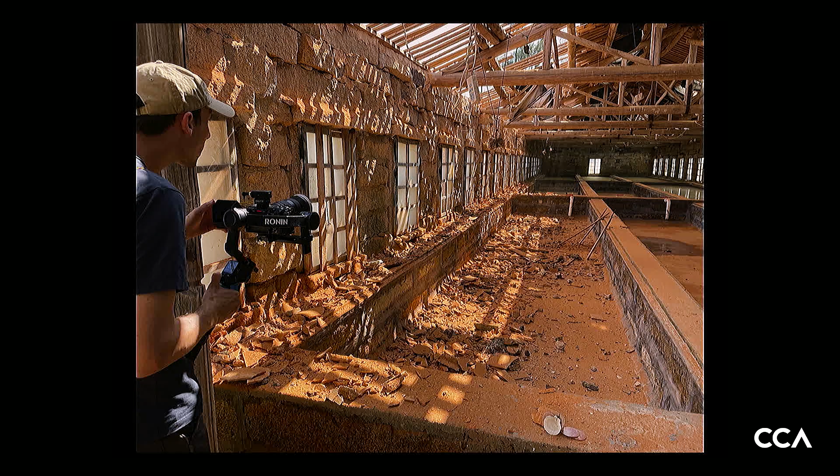In the CCA galleries tonight, you will encounter a film shot across October and November last year, 2023, documenting the encounters, the visits, the research conducted by Xu Tiantian to progress the project in Meizhou Island, but also artifacts, documents, specimens, and site fragments as evidence of an ongoing thinking process focused on the relationship with communities, reactivating rural and biological systems, and using architecture as a practice of repair and care.

Tiantian will tell us more about the story in a second. So I think it's a moment to introduce the protagonist of the night. I will just mention a few words about you, Tiantian.

Xu Tiantian is the founding principal of DNA Design and Architecture, and she's professor in practice at Tsinghua University School of Architecture. She received her baccalaureate in architecture from Tsinghua University in China and a master's degree in architecture and urban design from Harvard GSD.

Xu Tiantian has engaged extensively in revitalizing processes in rural China, and her holistic approach has led her to be selected by the UN, with several projects used as case studies for inspiring practices on urban-rural linkages.

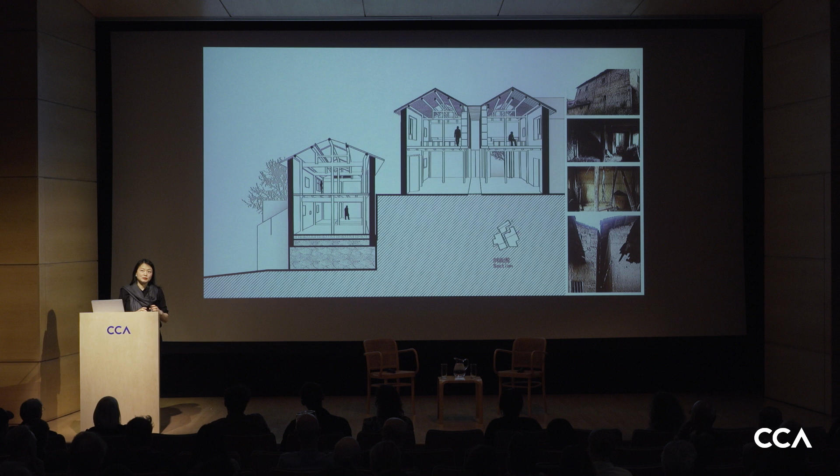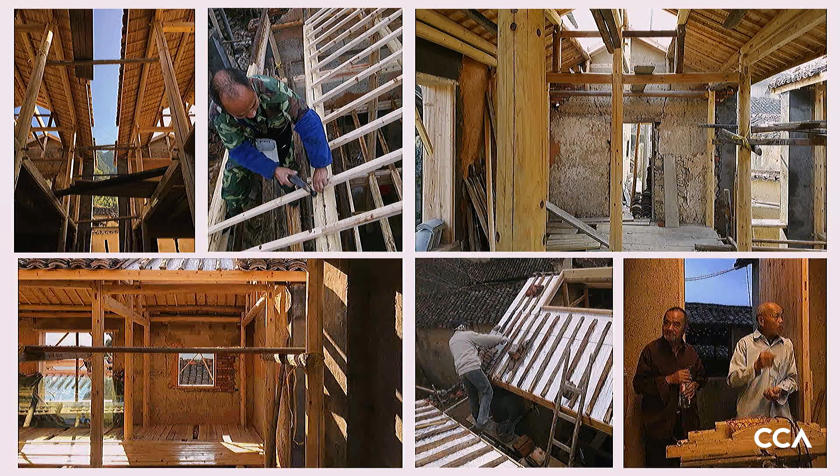Even though they were in poor condition architecturally, they still represented the original fabric of this ancient historical village. So we made the proposal to preserve this cluster without touching the exterior, because of the regulations of this traditional village, by only reorganizing the interior program and opening up the space to accommodate community programs and potentially other programs. We presented this proposal to the local county government as a pro bono design project, requesting the county government to sponsor the funding for renovation of this cluster for the village community.

This really became the beginning of how we started this collaboration in the county for 8 years. The project was constructed by the local villagers, and the interior space could be reused for different programs like exhibitions or

artist studios. Actually, the space after renovation inspired two young artists to return home from Hangzhou city and set up their studio, a fabric studio, which also brought new cultural and educational programs. These young artists also helped the local villagers work with handcrafts and sell them on the internet. So this really became a new transformation for this ancient village.

When we first arrived, there were less than 20 elders living in this village, and after a few years, the number of inhabitants has grown to over 200. So this really becomes a starting point of a systematic collaboration we proposed to the local county government by adapting this architectural acupuncture approach.

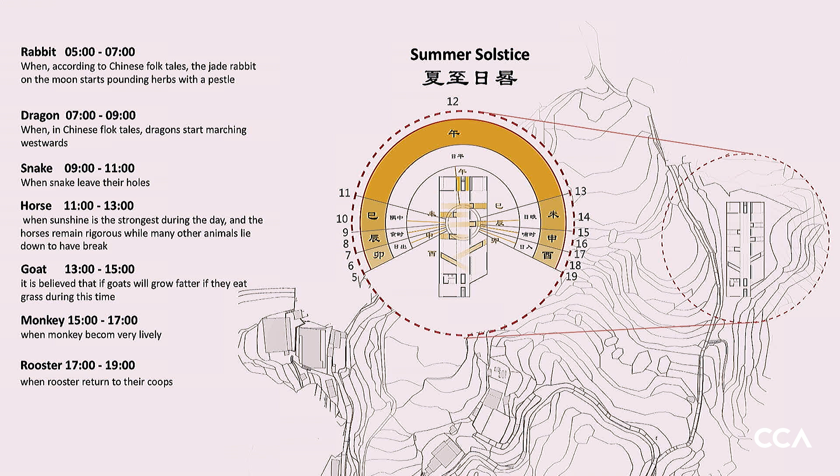During the summer solstice day, from sunrise to sunset, there are 7 zodiac hours: rabbit, dragon, snake, horse, goat, monkey, rooster. The zodiac pattern is based on the different species and their activity patterns.

So the building, with a simple form, has light tunnels coordinating with the sunlight angle of the different zodiac hours.

This articulation brings, during the summer solstice, light into the space from sunrise to sunset, passing through different light tunnels that act as a sundial.

By noon, the horse hour, it moves into the afternoon. The space really becomes a sundial, and we wanted to take this as an interpretation of how tea cultivation also becomes a culture, a symbol in our culture.

At the same time, the volumes, as light tunnels, become a monument, as if the sunlight is frozen during the summer solstice time.

We found that exploring into the agricultural past and history is really about how people live in this place. People have lived in this village for many generations, for hundreds of years, and each village built up its own legacy, its own cultural history and heritage.

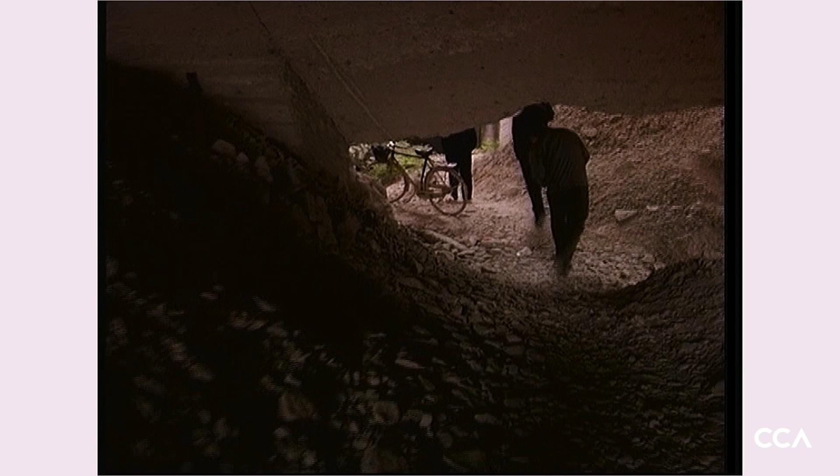I want to start with a documentary taken before the quarries were closed down. You'll understand that these spaces were manually quarried by local workers with skill and technique passed through generations over more than 1,000 years.

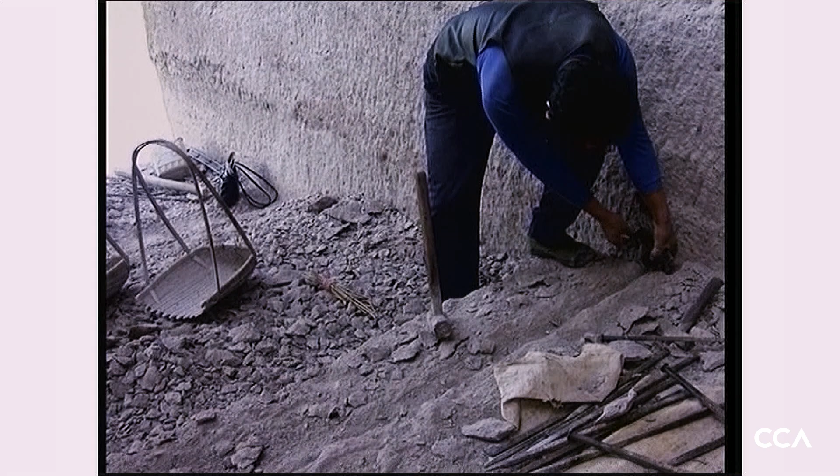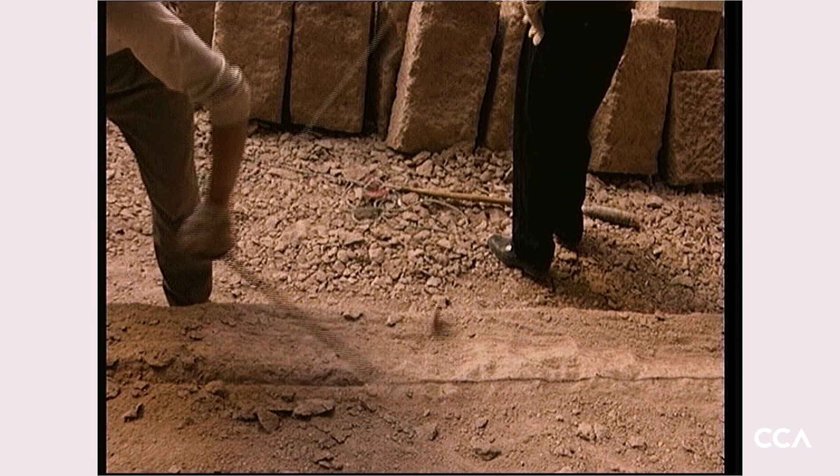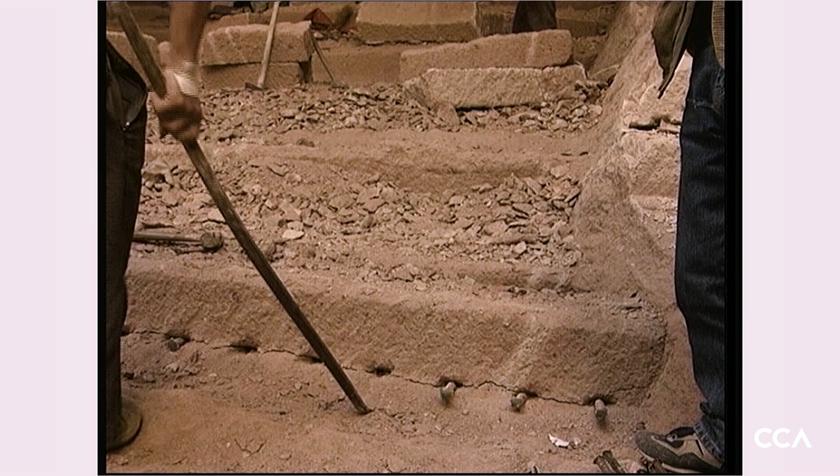On one hand, it's a technical heritage, but on the other hand, it's also very harsh, intense labor work in a very harsh environment. People living in this region made their living out of this quarry, this very intense quarry labor work.

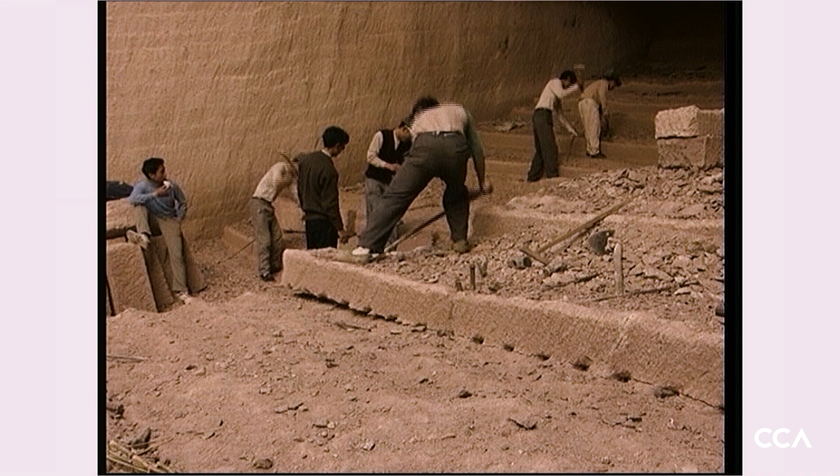So when we first visited all these abandoned quarry spaces, we were definitely overwhelmed, really impressed by the space, but at the same time also came to understand how local quarry workers were very passionate

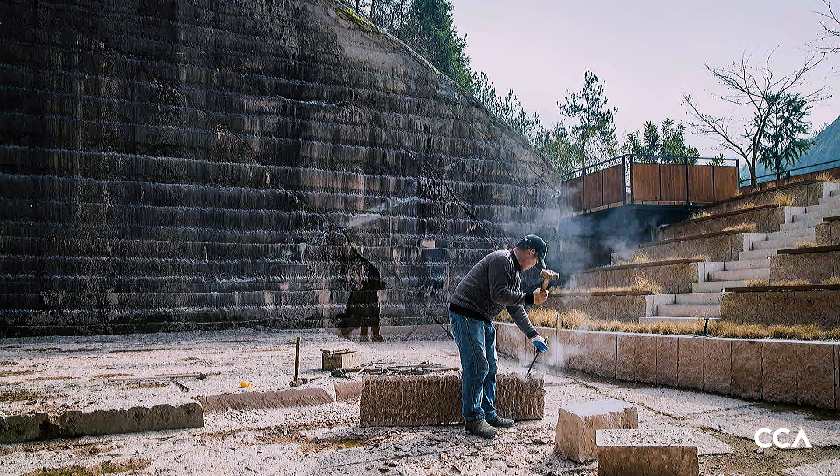And just within 6 months, 3 quarries were built with a new design intervention, with the first one as a showcase stage for the local quarry workers. It's really by their request. They wanted to still have a space to demonstrate their technique on quarrying, on this manual quarrying.

And the second quarry becomes an open theater for young villagers or for traditional opera performance. And the third quarry, taking the interior geometry, becomes a book mountain, addressing the local literati spirit and calligraphy history.

So I think for the quarry project, it was more to try to understand the local collective memory and take this existing abandoned quarry space as existing structure, existing architecture, so to reuse the space instead of making new buildings on quarry as topography.

And on the other hand, it's also not only to appreciate the beauty, the sensation of this space, but rather to understand the struggle of local people and what they believe in or what they hope for.

And for us, these quarries were really also the monumental architecture built by local quarry workers as anonymous collective. And architects join in this process as the facilitator to contribute and also to transform these already existing monuments into something that can be accessible for the public and also can connect back with the collective memory belonging to the communities.

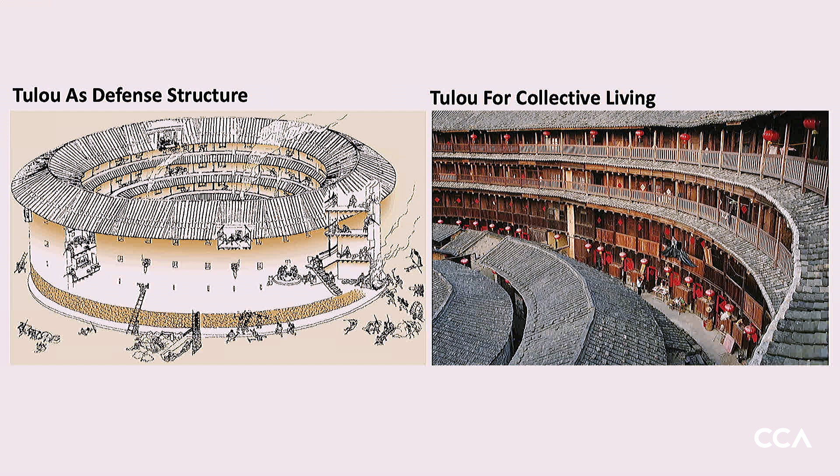the only vernacular typology that is without hierarchy, because every family will have even distribution on the units, on the families.

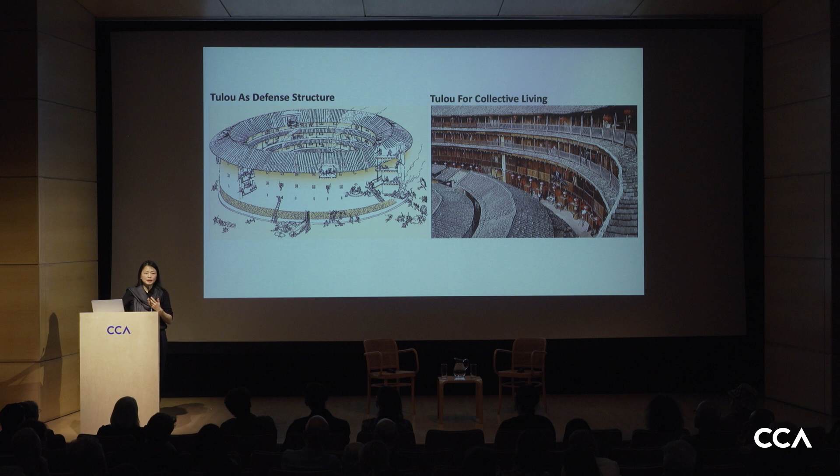And I think for decades, with the economic development, Tulou eventually lost its original functionalities. So many people moved out of the Tulou buildings, and thousands of Tulou actually became vacant or abandoned. So that's really the current condition.

We encountered Tulou with just a visit to the region, and then we realized this is an urgent social architectural issue that could be fixed with design as a solution.

The problem with all these Tulou as heritage buildings is that with the preservation policy, you have to rebuild everything. So the local government wouldn't have enough funding to rebuild thousands of Tulou buildings.

But if we take the ruin as a new typology, then we can collaborate with the local community by looking into taking the current condition as the starting point.

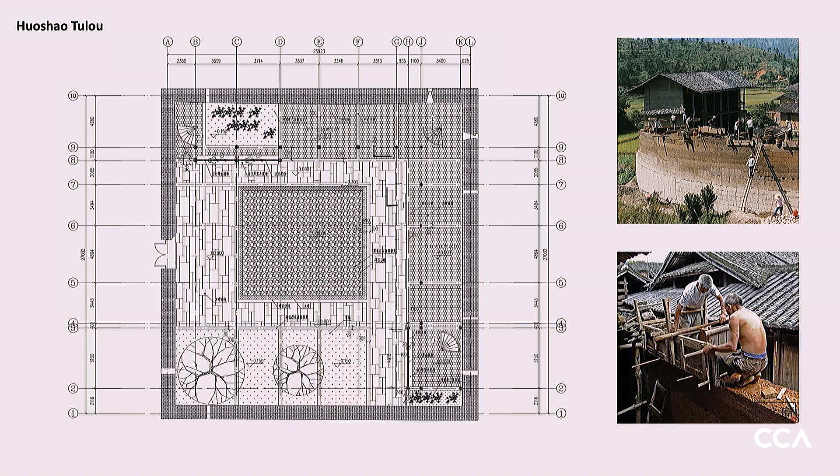So for each Tulou, you don't need to rebuild, but really introduce a new program according to the village history or the context, and take the ruin as a courtyard or a new garden or lookout terrace.

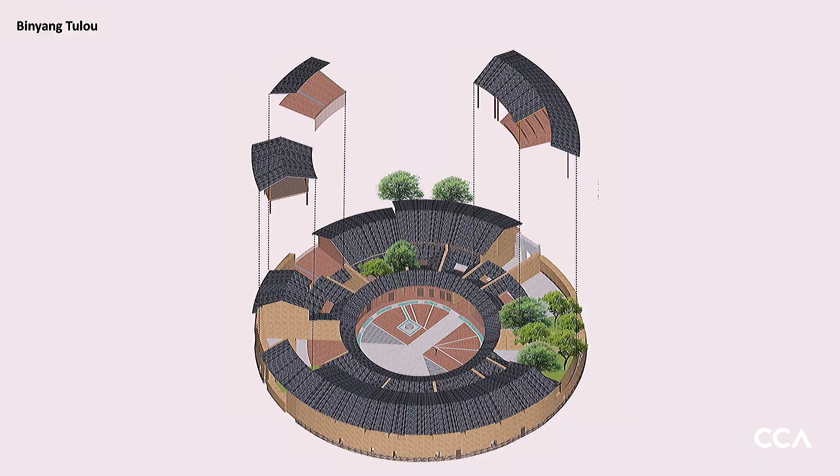So with this new cultural or public program, these Tulou buildings can still become a community center to preserve the collective memory. And even the ruin, you can change the perspective of seeing the ruin become the merging process.

In the past decades, when Tulou became vacant, it becomes the transformation of this building, this Tulou, as the ecological building merging with the nature, and the trees become the new inhabitants.

So in that sense, with a much more practical and economic solution, this design strategy can reuse the Tulou as a public cultural space or facility.

And we want to argue that this vernacular typology can still be performative in our contemporary context, with design and architecture providing the solutions. So now we arrive at the Meizhou Island.

For the previous projects you've seen, they're always in the mountain region. So arriving at Meizhou Island, this is an island belonging to my home city, a small island, but also the birthplace of Mazu, the goddess of sea. Mazu is worshipped by the global Chinese community, with Mazu temples around the world, but the original temple really originated from this island.

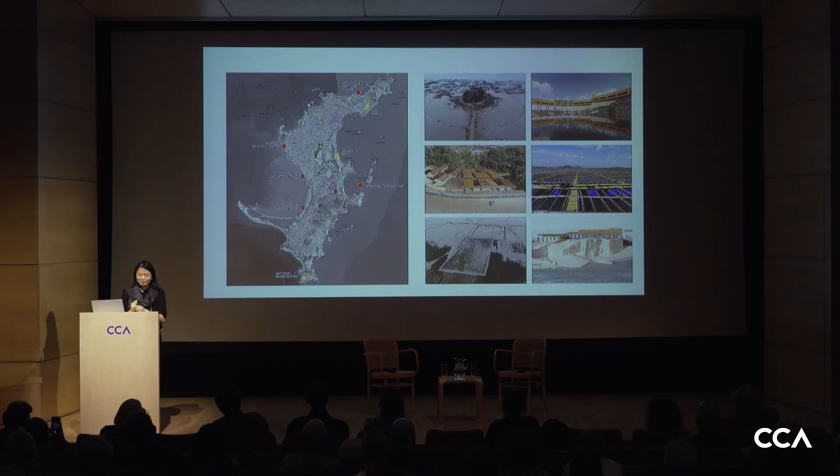So this became a collaboration to introduce, if you see the red dots, 6 new locations. Instead of one iconic museum, we proposed a cluster of design interventions to interact and integrate with the local communities. The program is tailored to the production and culture, all the local life activities happening on this island.

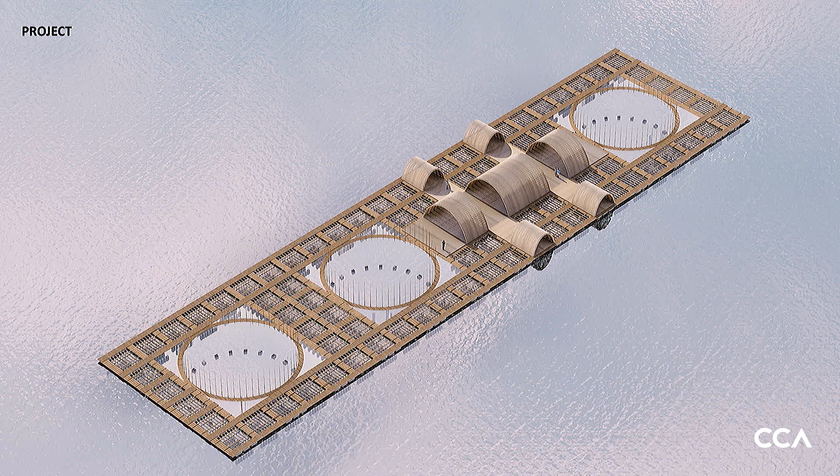I think you can also watch the movie to understand better about this process, where we were literally guided by local fishermen to visit and understand their production, like kelp and fish cultivation, and also oyster and abalone production. For this design, we didn't really have to make a building, but rather integrate what was already existing, belonging to the life and production on this island, to integrate kelp and fish cultivation, and also provide a research-based platform for young scientists or researchers at universities in the region.

Through discussion and communication, just asking local people about anything interesting or anything that belongs to their daily life, for us it was really an exploration, a whole journey, really to look into and understand the daily life and life routine on this island.

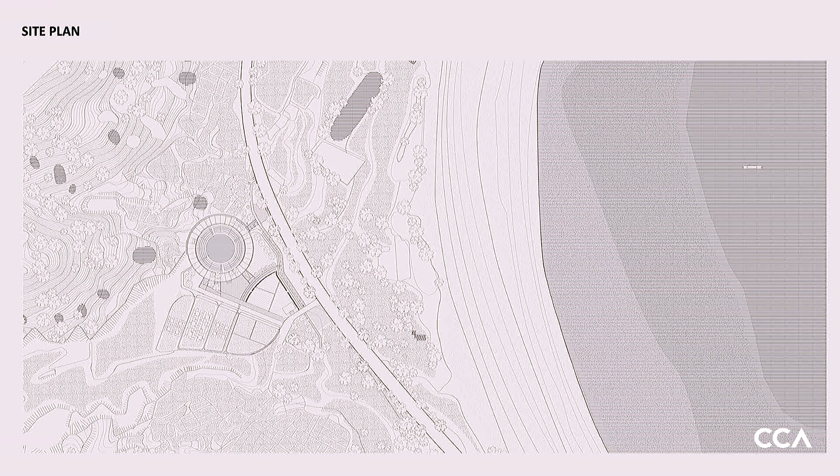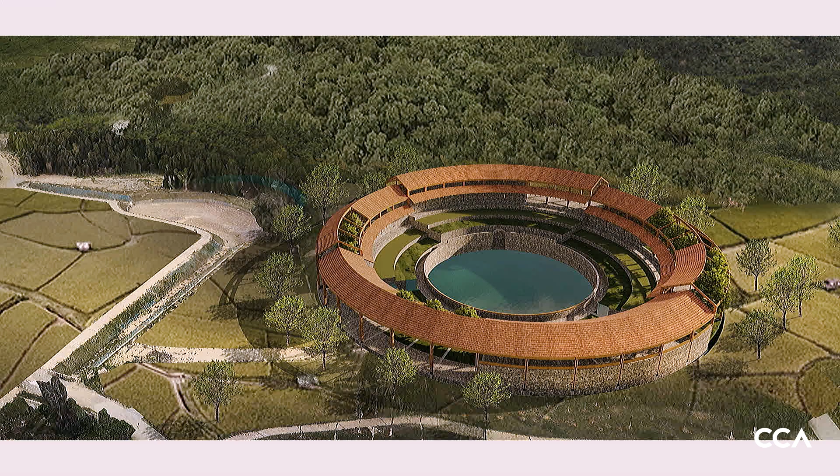So that became an initiative to build a filtration water plant using gravity, filtering water through water grass or lotus, a natural filtration system, to reactivate the adjacent vegetable farm. And the architecture becomes an extension of this infrastructure.

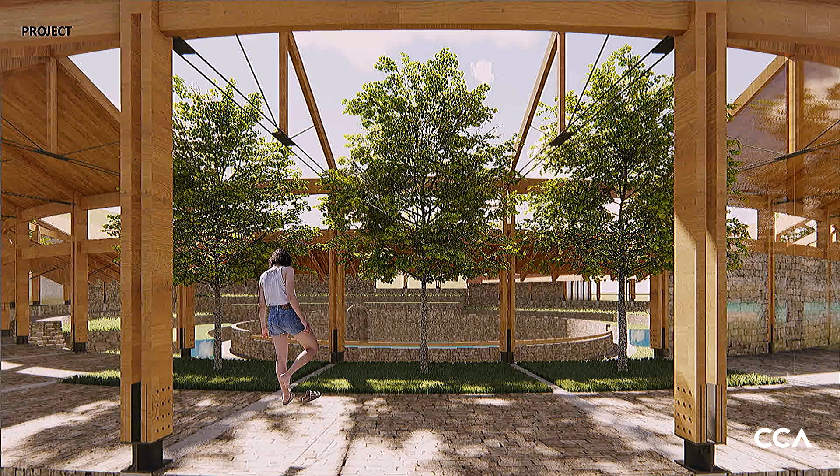At the same time, it's also an open leisure pavilion or educational space for local school children. Together with the vegetable farm and the melon shed, this also becomes the architecture. We consider this as part of the architecture, and together with this wastewater treatment plant, it becomes a learning platform for visitors as well.

So they have already started this plantation of vegetables.

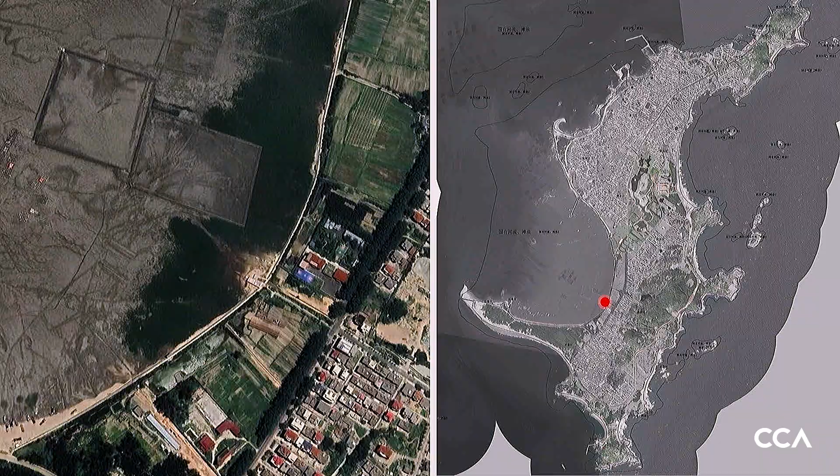And when we walk around the island, we reach this point. This is the mangrove plantation, which is to restore the local coastal ecology. Mangroves are known for being a very intelligent ecosystem, which not only restores the ecology but also provides shelter for biodiversity along the mudland.

The project started by looking into an abandoned structure on the land, providing space for visitors and researchers. Eventually we realized that on this side of the island, you don't really need to develop tourism, but rather preserve the ecology.

So the design shifted from making a building or renovating a building to reusing this abandoned fish pond, which was closed down because of the mangrove plantation restoration. The fish pond was polluting the nature, and was closed down and abandoned for years.

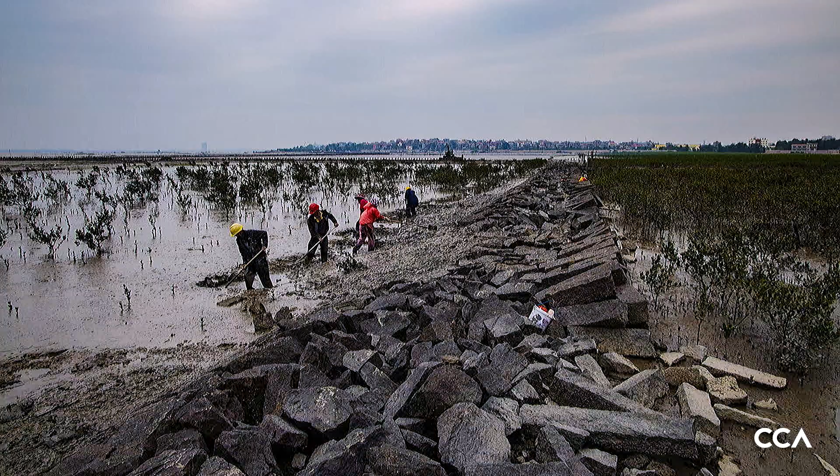After the plantation of mangrove, we consulted with our mangrove scientists and researched online, and they came up with a design that's only to renovate or fix the broken parts of this fish pond by collecting the stone pieces that were just falling apart. It was a very easy process to collect all these stone pieces and then rebuild this, to fix this fish pond and also the water gate.

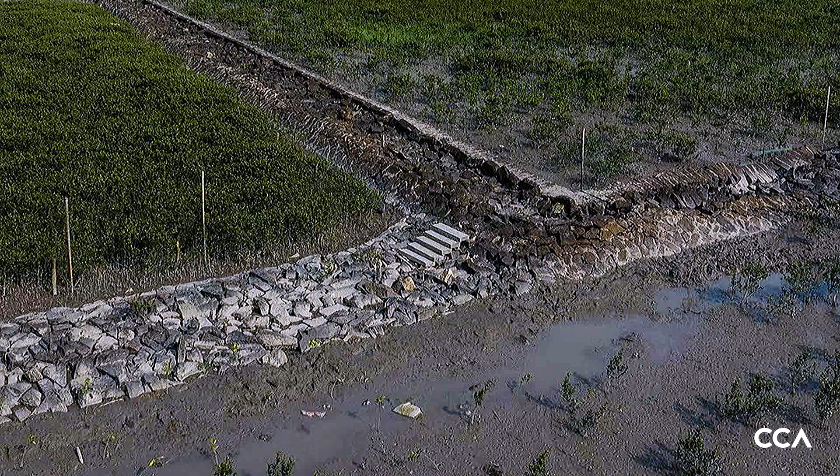So the pond becomes a space to really become the shelter for biodiversity, for fish, for birds, crabs, and clams living on this mudland. At the same time, we also introduce a new layer, just by very simple steps, for the researchers. So this reuse of the fish pond can also become a research base for our researchers coming from the universities.

For this project, instead of making a building, we take this existing structure, but also the structure working together with the high tide and the low tide on the mudland. It really reshapes our thinking of what is architecture, because the high tide and low tide already create a space that is built up by nature, by the ocean. So the fish pond will emerge when the water goes down, and you can really see the shifting of the water level here.

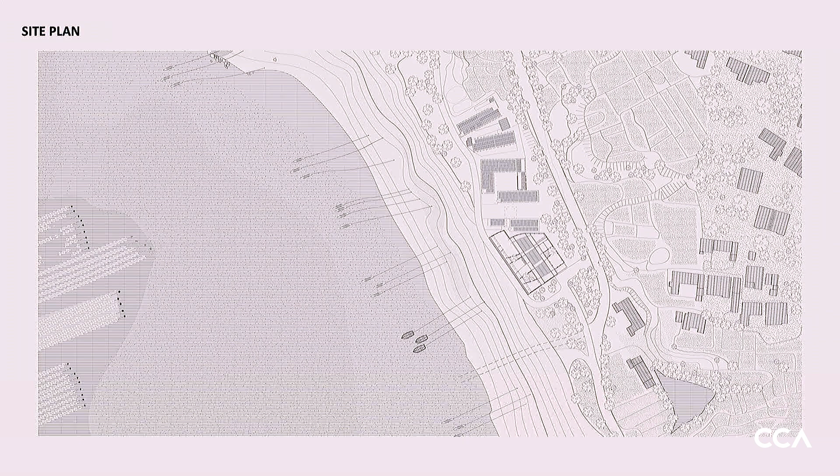Another discovery was the seaweed cultivation, which I thought was the most beautiful structure I've ever seen. It's really an ephemeral structure made of bamboo. Local fishermen cultivated these seaweed seeds with oyster shells, soaking them in the ocean water within this structure for 10 months during the year.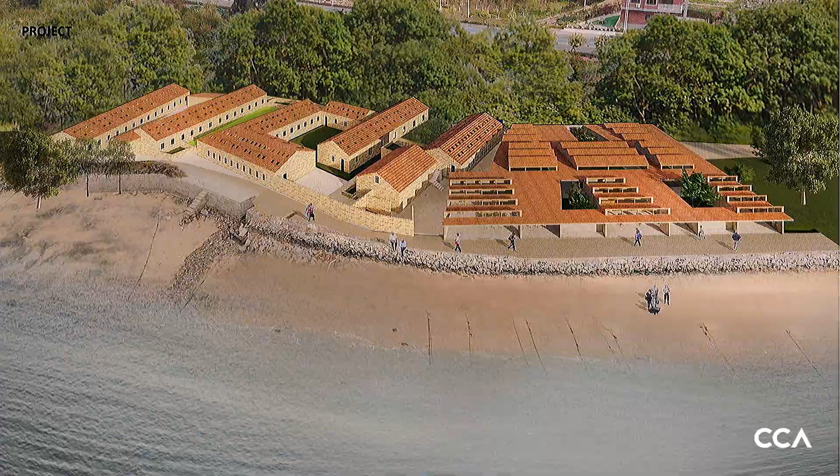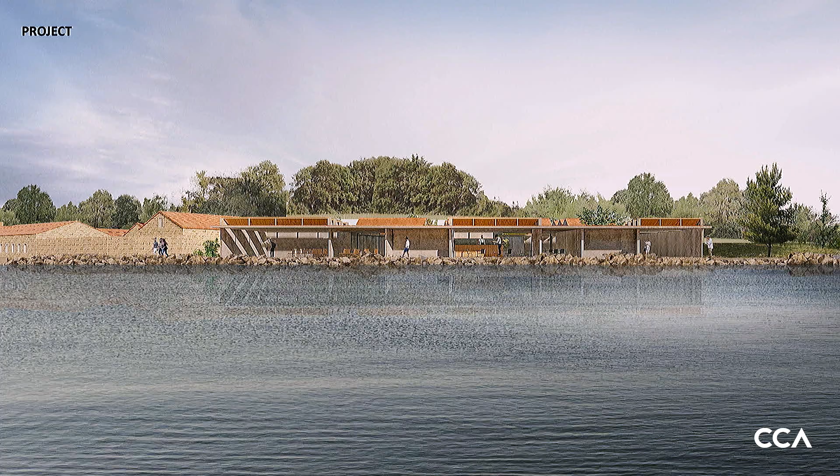So this inspired a new program, taking this seaweed incubator as the center of the space. Basically it's a production workshop, but we can also add in a new cultural, educational, or leisure program facing the ocean, which becomes a workshop for the villagers and fishermen, but also a learning classroom for visitors. The project is ongoing with a mock-up for our stone walls, also working together with the oyster shell.

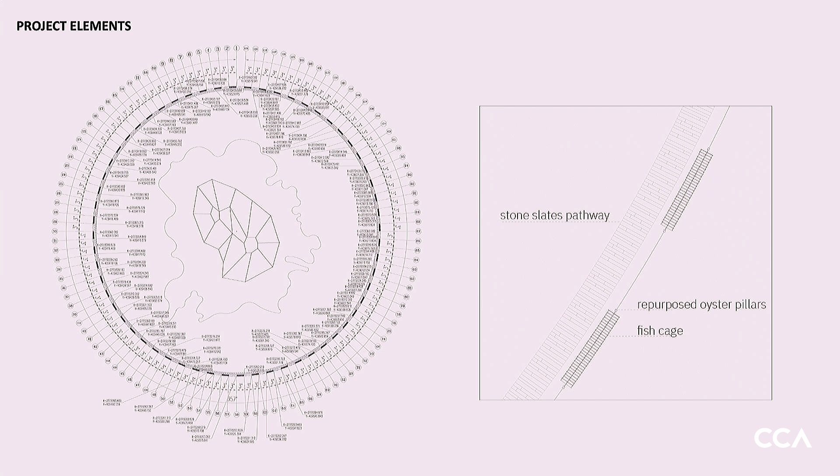The mudland cultivation is not only with the seaweed, but also with the local oyster pillar, which opens up an enormous new ocean farming on the mudland. Everything already exists on the site, so our intervention is only to introduce a passage based on the existing cultivation system, invented by local fishermen for hundreds of years. A new walkway will bring public access to this ocean farm, serving as an educational and knowledge learning platform.

With the high tide, it covers up the entire mudland. But when the tide goes down, the space will really emerge and become land accessible for the public as a knowledge learning experience or exploration on this mudland.

The last one goes back to the starting point next to the temple, the location for the building, looking into the arrival harbor for the fishermen coming back home with their boats. This is the harbor where, after fishing, the boats arrive home, looking up to the temple and the Mazu statue, collecting whatever they've fished during the day and taking everything back home.

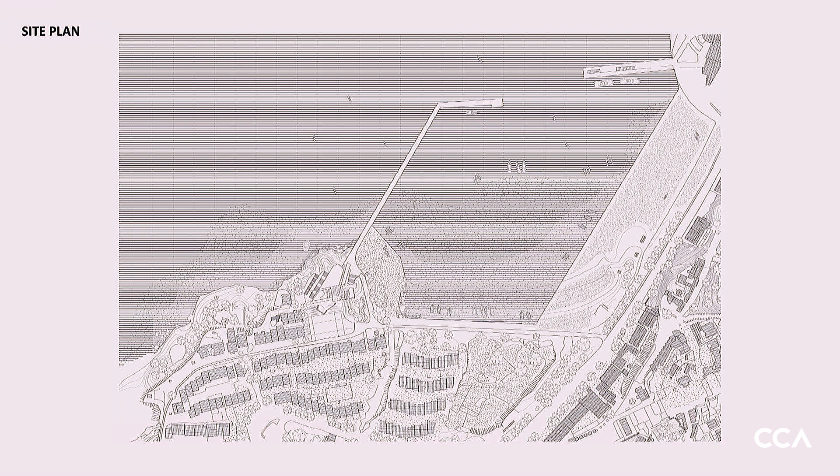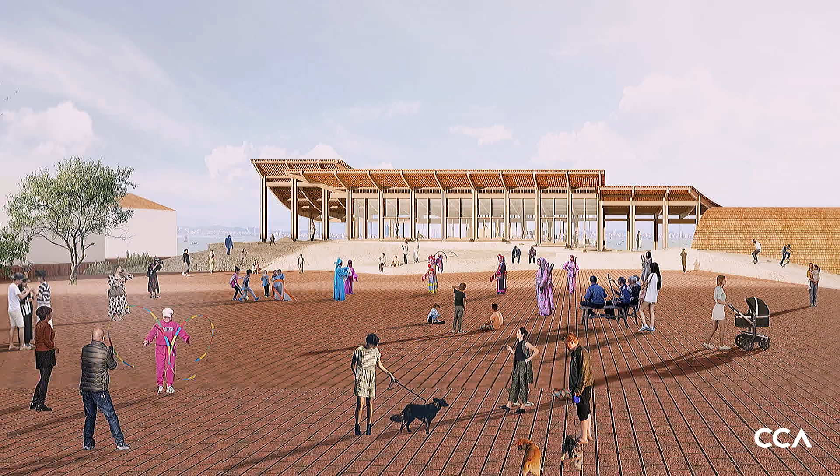The plaza becomes the intangible heritage space for cultural or celebration activities after work. The design again takes the cliff as an existing structure, as existing architecture, and the building simply adds a new roof. The cliff becomes the space of architecture with the new roof, welcoming the fishermen returning home to this open plaza.

I'm going to finish with two Chinese phrases. The first one is 锦上添花, which means similar to icing on the cake, adding flowers to embroidery—extra additional decoration to something that is already good. Architecture definitely can be 锦上添花. But we also believe that architecture can become, in a different way, 雪中送炭, meaning providing charcoal when it snows—providing necessity in terms of urgency. We believe architecture can have more strength, influence, or capacity when you take it as a tool or means of 雪中送炭. Thank you very much.